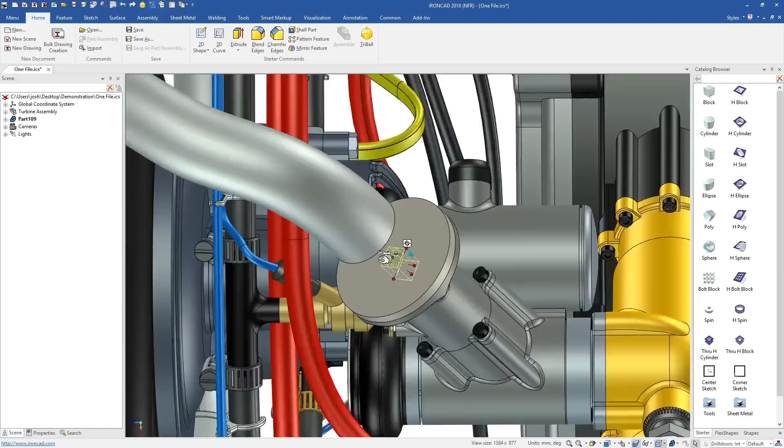IronCAD's advantage starts with letting you design in 3D from the beginning. You can skip the traditional steps of creating a plane, creating a sketch on that plane, and then creating a feature or extrude from that sketch.

IronCAD has a range of predefined shapes which you can simply drag and drop out. You can then push and pull them to make precise changes in seconds.

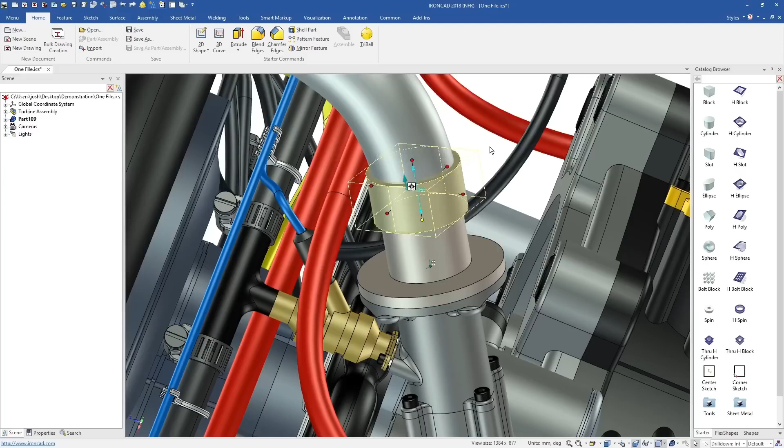These shapes are features in disguise. They still have cross sections and feature types which can be edited anytime. You can also save custom shapes and make your own custom catalogs with a simple drag and drop.

This method is faster, easier to understand, and you get to skip the boring steps. These shapes and catalogs also have more advanced functionality built in, which we'll cover later in the video.

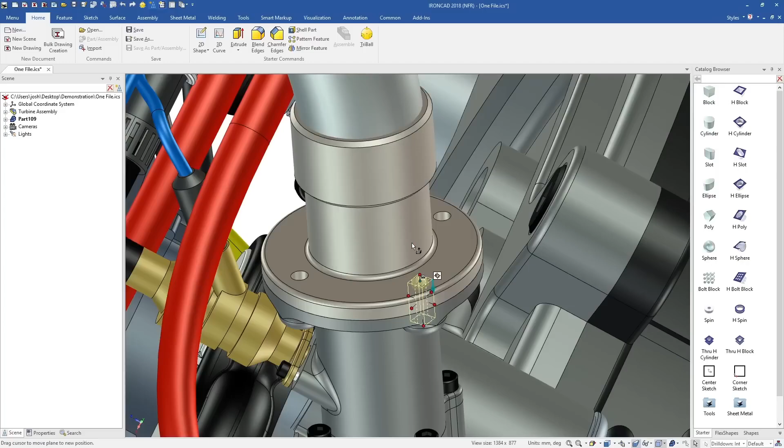You may have noticed we are designing multiple parts in the one file. IronCAD has a unified design environment, so you can design as many parts as you'd like in the same file. This of course makes file management a lot easier when compared to the traditional idea of having many individual files, but the advantages don't stop there.

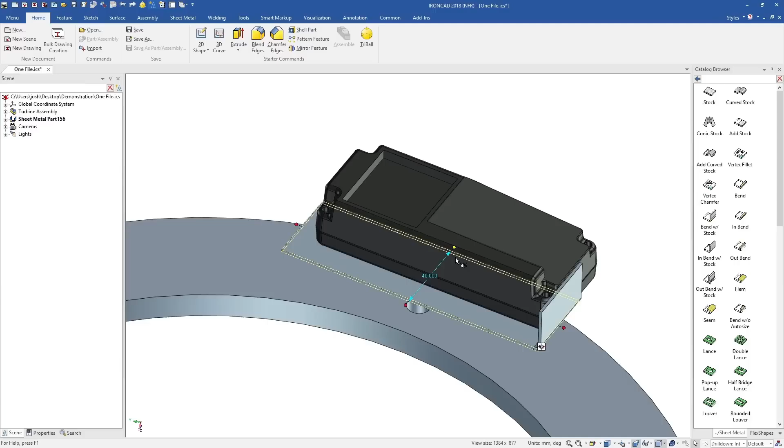You're designing within the context of the assembly, which is a more natural way of thinking about your design. You can snap to existing parts and everything fits perfectly first time. You can also largely skip the mating and constraining process from traditional CAD software.

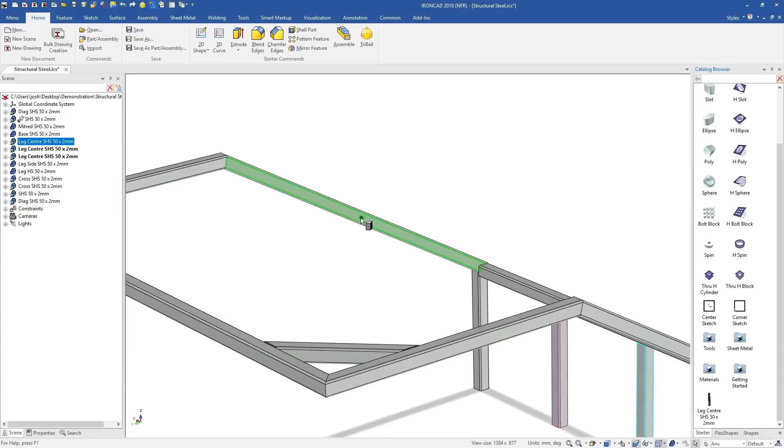Traditionally, you would make every part individually, then at the end, bring them into an assembly and mate and constrain them all together. In IronCAD, they're already in the right place, so there's no need to do this.

Then if you have moving parts, you can simply apply the movement constraints to those parts. All other constraints can be skipped. Anyone who's constrained a large assembly in a traditional CAD system before will know how much time IronCAD saves here.

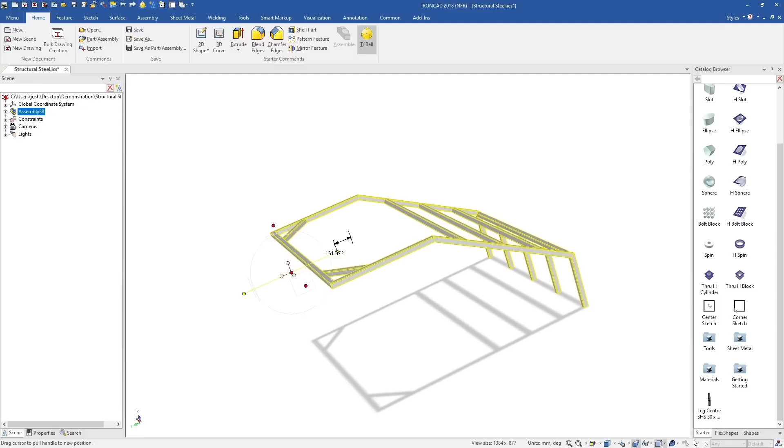Then when it comes to 2D drawings, you can create all your individual part drawings from the one 3D file. We can select the parts for the individual drawings, or even use our bulk drawing creation tool, which will automatically place predefined views and create new drawing sheets for each part and assembly.

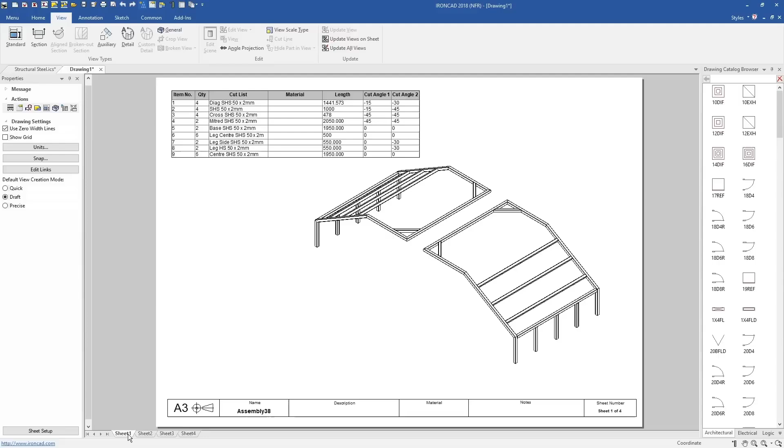And of course, when making changes to any part in 3D, the 2D drawings will be automatically updated for you.

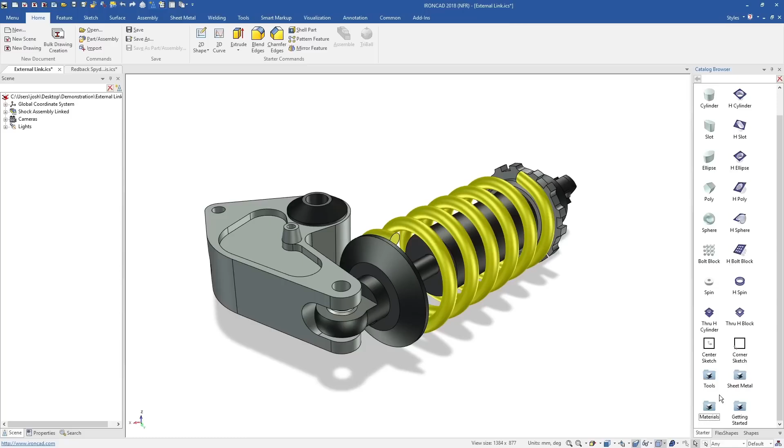It's worth noting that if needed, you can still save parts and assemblies externally and individually. For example, if you have multiple areas of your organization using the same part and you want any changes to update everyone's model at once.

This can be done at a part or assembly level, so it's easy to control and easy to set up. The part can still be edited in that one file, it's just saved externally and will update other models as well.

Overall, IronCAD makes file management and collaboration much easier than traditional software.

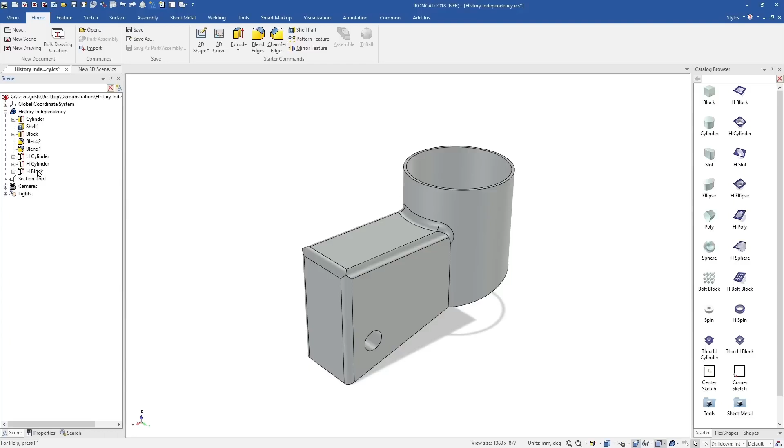Another big advantage of IronCAD is the flexibility to make major design changes at any time, including late in the design process. Traditional software is history dependent, so features are dependent on other items above or below them in the history tree. This makes it difficult to make late design changes, and also results in these other systems often having history tree crashes, which you may be familiar with.

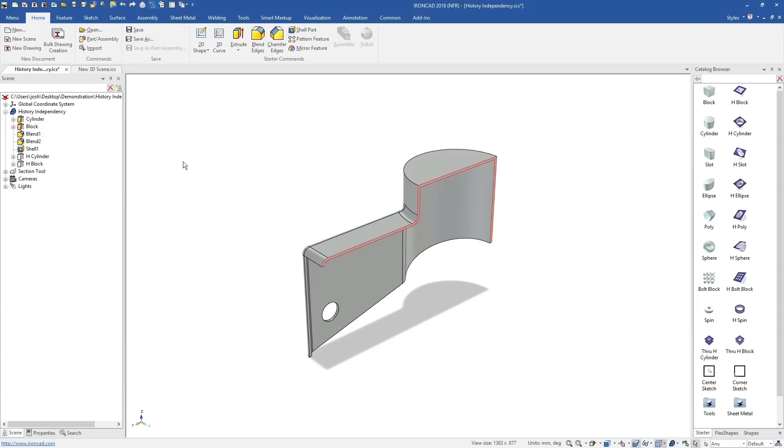IronCAD features are independent, so they can be moved up and down the history tree easily. This makes design changes easy because you don't have to worry about the design intent from earlier in the model.

IronCAD lets you choose when and where you'd like to use design intent. This provides better control over your design and means changes that may have taken hours before can be done in minutes.

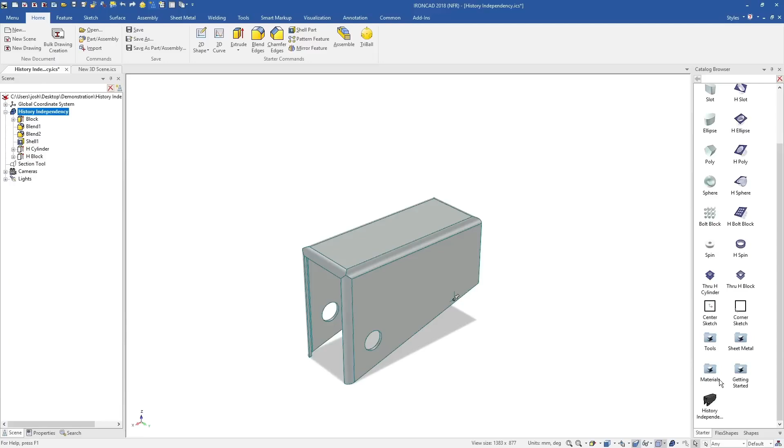This feature independency also makes it easier to reuse features and models. You can drop them into a catalog and then drag them into other parts and assemblies, where they can be customized to suit the new model as if they were made there in the first place.

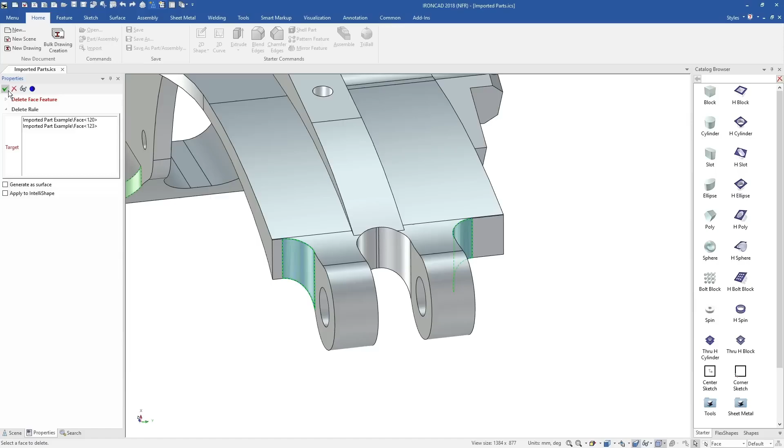Now let's look at imported geometry from other systems. In traditional systems, imported geometry is often hard to edit and reuse. In IronCAD, we have a range of direct editing tools which make this fast and intuitive. You can delete items, like holes or blends, and directly push and pull faces, controlling them by snapping to existing geometry or typing in precise values.

You can directly reposition faces using the TriBall, and IronCAD will find the best way to accommodate your change.

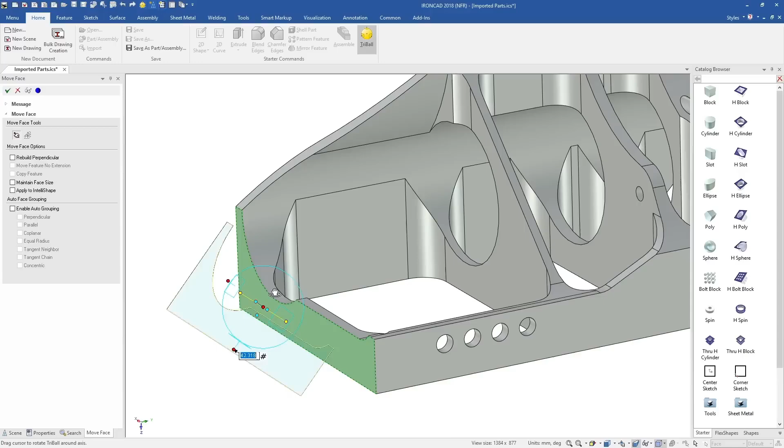You can select faces and convert them into IntelliShapes, which have cross-sections that can be edited anytime. IronCAD will automatically detect features that look like they should be in a pattern and link the shapes for you. Of course, they can be unlinked anytime if needed.

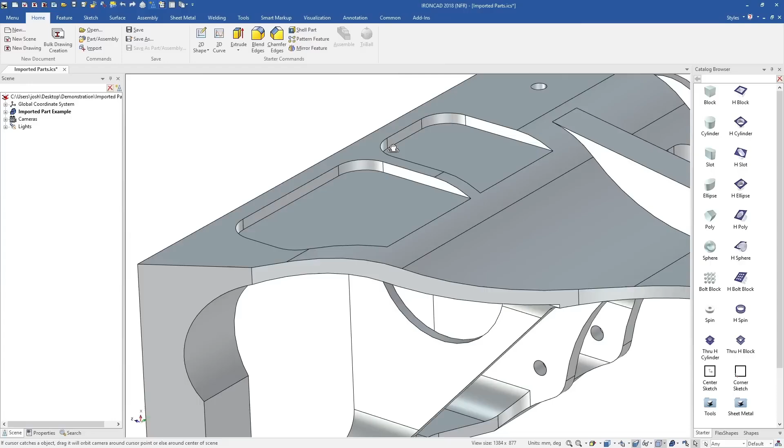When direct editing certain features, IronCAD will also use the surrounding geometry to help understand the changes you're trying to make.

Whilst these tools are specifically useful for imported geometry, you can also still use the catalog shapes on imported geometry as well.

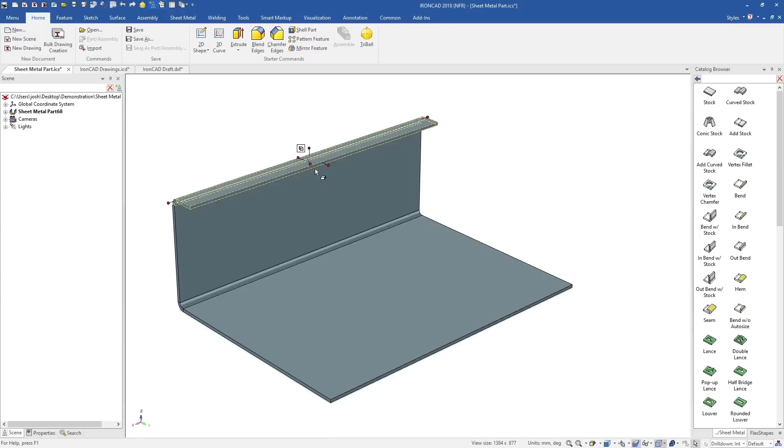Now that you've seen an overview, let's show you a few more details. Like many other tools in IronCAD, the sheet metal tools are drag and drop, made to be extremely fast and easy to learn. You can push and pull on sheet metal features to adjust them, use specific sheet metal tools like the miter tool, and still use other IronCAD features like the catalogs and the triball.

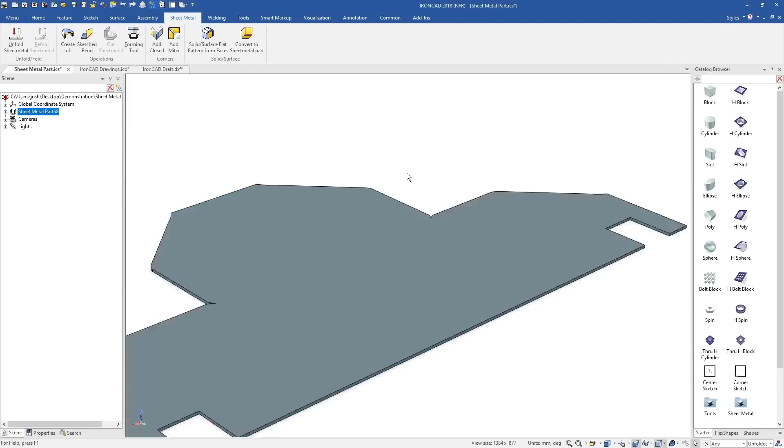Sheet metal parts can be unfolded at any time and exported for production with their bend lines. This can be done in both of IronCAD's drawing environments, the Paperspace ICD environment, and the IronCAD draft environment. As usual, any changes in 3D will automatically update any 2D drawings.

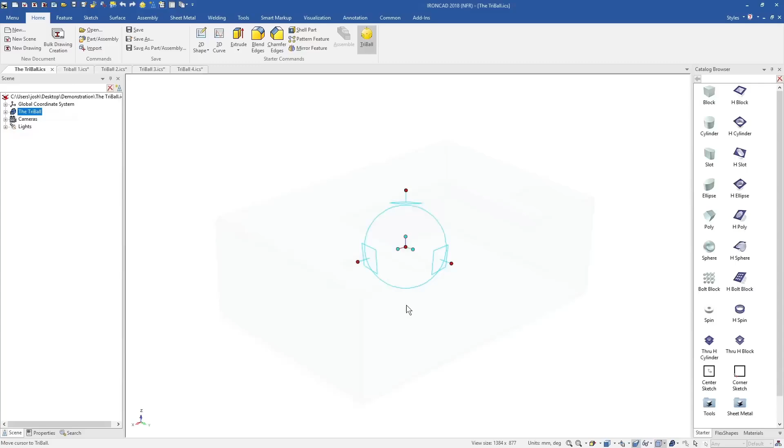This is the triball. It's a patented tool that IronCAD has developed for over a decade. It's won numerous industry awards and can do just about any positioning or copying function, all in just a few clicks, and the whole time keeping you in 3D.

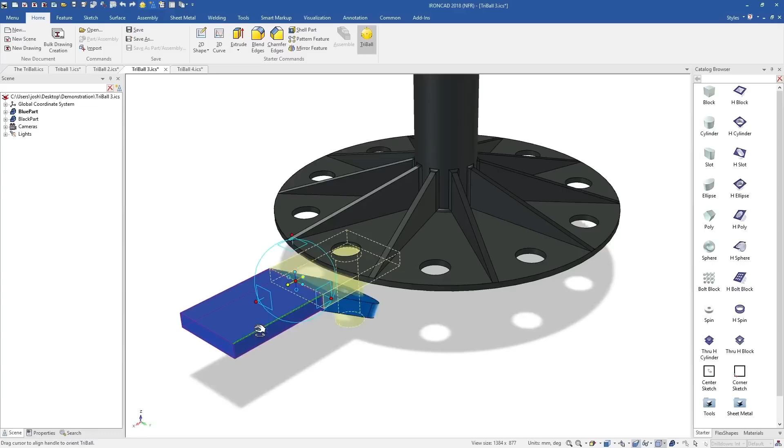The triball often replaces the need for reference planes, positioning constraints, and patterning tools all in one. It can be used with shapes, parts, assemblies, and more, and can save hours upon hours of design time when compared to doing the same thing in a traditional system.

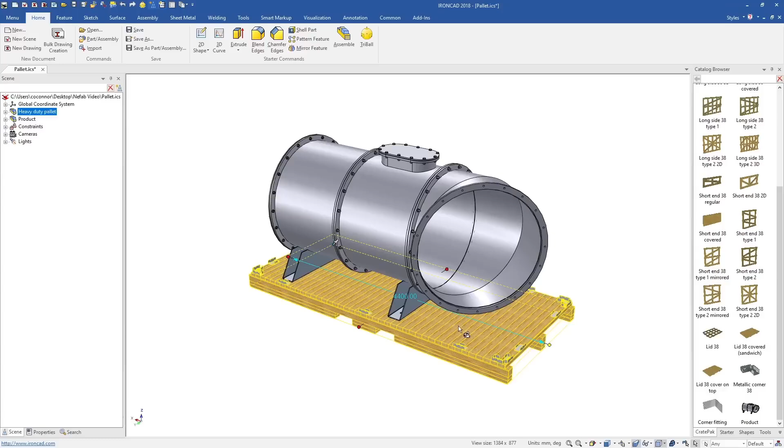Here we have a parameterized model, which is driven by push and pull handles at the assembly level. Instead of editing a table of figures like in traditional CAD software, IronCAD can drive these parameters from handles created on the assembly.

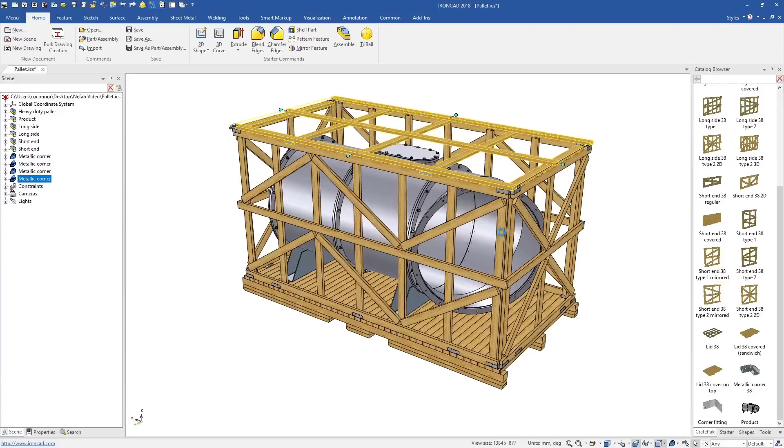Every part in the assembly is being automatically resized and repositioned based on the size we choose on the overall assembly. This creates a range of opportunities for parameter-based design and makes it easy enough that just about anyone can use it.

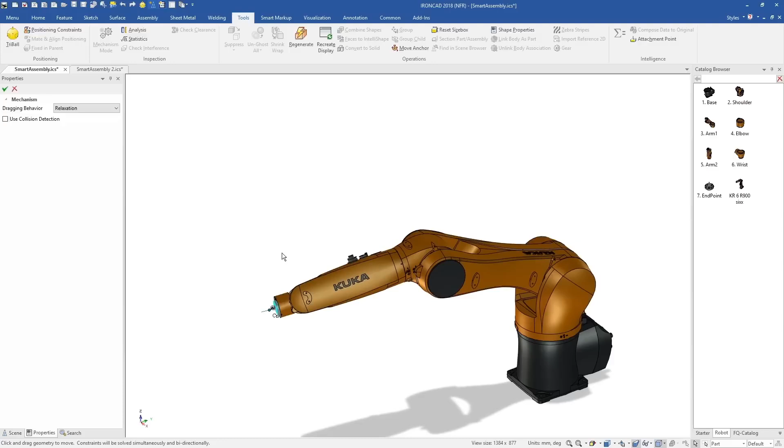Earlier we mentioned that catalogs and shapes can have more advanced functionality built in. Here's a catalogue of robot parts, which when drag and dropped onto each other, automatically position and constrain themselves with predefined movement. IronCAD's attachment points act as magnets, which align and position the geometry when it is dropped near them.

Another catalogue here is filled with modular cart components. It contains both parts and assemblies, which automatically snap into their exact location and can be swapped in and out in seconds. This functionality can be used throughout IronCAD products, so you can make a catalogue in IronCAD and then send it to someone using the free Compose Viewer or iPad app.

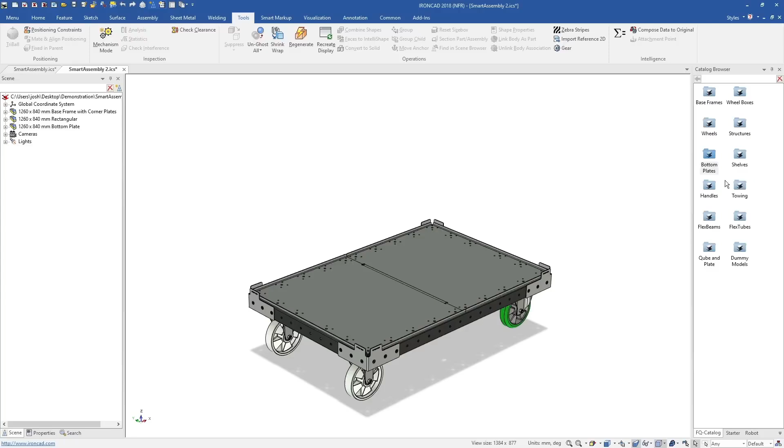They can customize it, make annotations, then send it back to you to finalize in the full IronCAD.